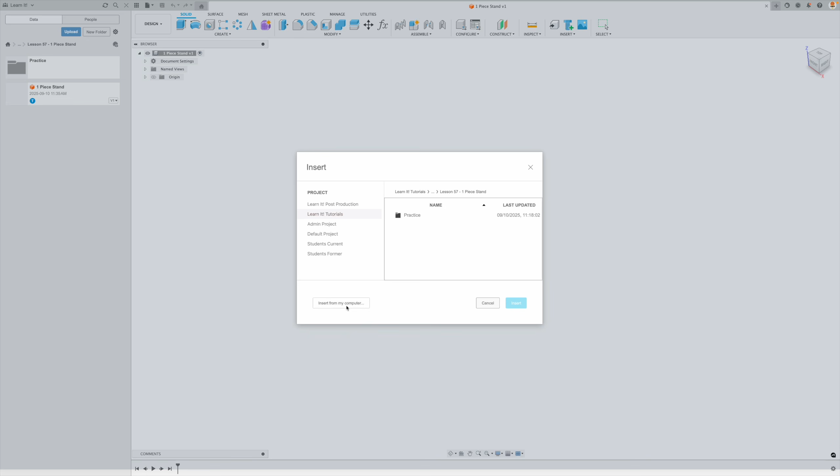Now, a lot of people will just go to insert and they will insert the canvas images. That is one way of doing it, that's completely fine, you can insert it from your computer. However, I like to put the images within my folder over here, within my project folder. So the way to do that is go to File and go Upload, and then you can just drag and drop the files that you'd like to use as your canvas images.

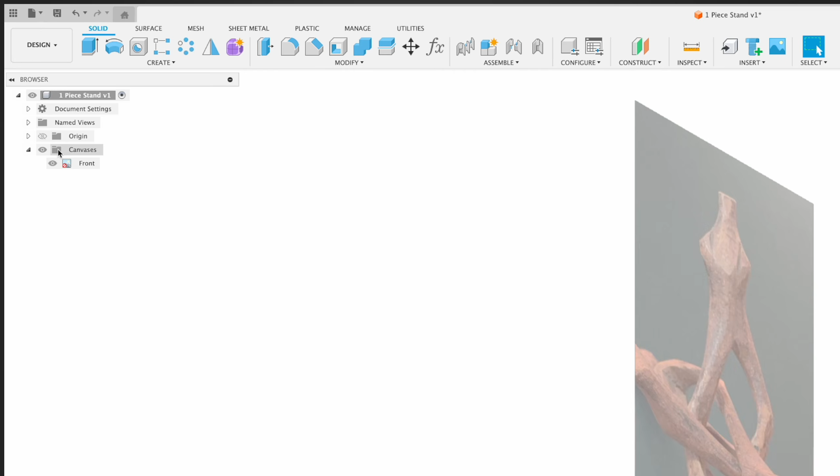Now let's go OK. The next thing we're going to do is calibrate it. Go over to your browser under canvases, and I'm going to right click on the canvas image and calibrate it. Why do we calibrate it? Because right now we don't know how big this image is. I can just go ahead and model it up and scale it later, but that has some disadvantages. So it's better to get your canvas image correct right off the bat.

And so here we go. Again, right click, calibrate. I'm going to select the nose and then select the tail. Here you can see the canvas image from those 2 points is 1.6 inches. I'm just going to call it 6 inches. Now this looks exactly the same, but it is indeed different. Whereas we model this part, the model will be exactly 6 inches from nose to tail. So there we have it.

So at this point, let's go into our form modeling environment. This is what so many out there would like to learn, but it is daunting. It is difficult. So let's get into it. Click on Create Form, and it's going to take you into the form environment.

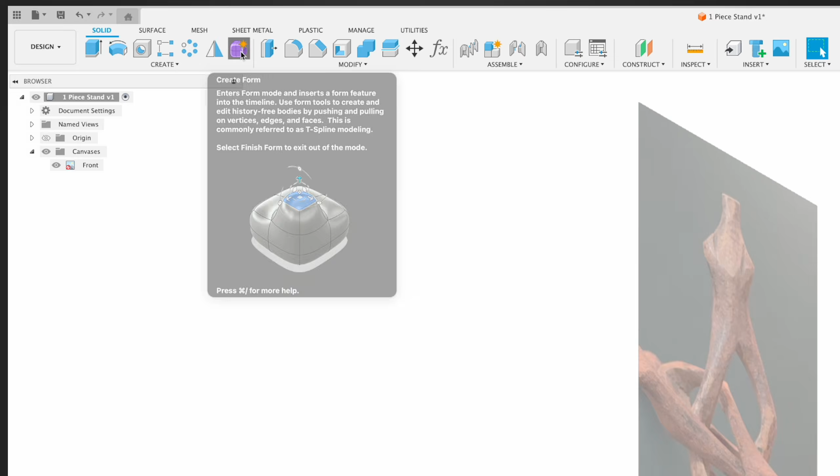I'm going to go back to the front view, and what we're going to do is create a face. Remember, in Fusion, left to right, top down. So we've got our Create drop-down menu here with all these different tools to work with. We create first, we modify later. We can add symmetry, and utilities help refine these different tools or make our design process easier.

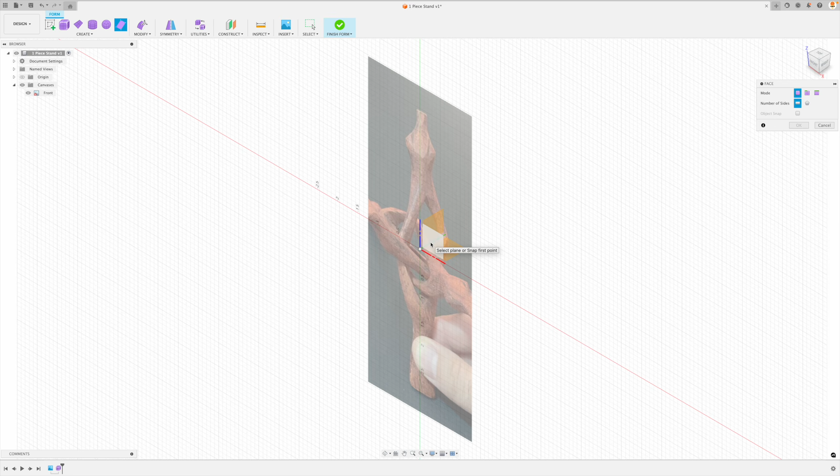So let's go Create, and I'm going to create a face. The first thing we need to do is pick our construction plane to work on. So we put our image on this construction plane. I'd like to create these faces on the same construction plane, so pick the XZ, and there we have it. We just hover our mouse and it says specify first corner.

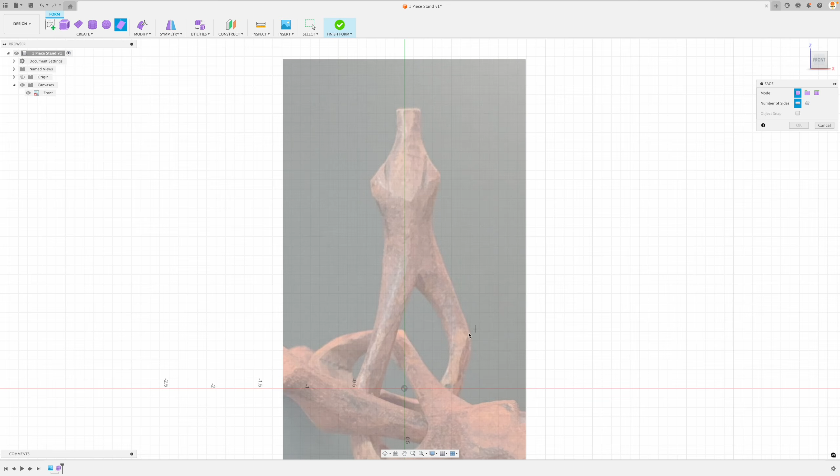Before we do so, I'd like to emphasize that my thought process here is that I know where all the peaks and the valleys are of this part. I have it in my possession, I can look at it. If you don't, you can just estimate where they are. For example, looking at the nose, I can see this little crest, that's one peak. As we go down, this is kind of a low point where it transitions to the other side. We've got another peak that doesn't go right down the center of the part, it actually goes this way. Then this is kind of a face that goes down there, and we've got a peak over there. But anyway, we need to see this kind of in 3D with our mind's eye and work with it. Don't think too much about this, just start modeling with me and let's have some fun together.

So I'm also going to picture a line going through the center just as a reference. Here we go, we're on simple mode. Actually, before we start going, you can see that my mouse cursor is snapping to the grid. If you don't want it snapping to the grid, hold down Command on a Mac or Control on a Windows computer and it will no longer snap. If you let it go, there we go, it starts snapping to the grid again.

Anyway, I'm going to create 1, 2, 3, 4 T-splines. We need to have a minimum of 4 points, it's the best method to use. We won't get into the reasons, but let's just work on down here. I'm just going to break this up. There we go, let's do something like this.

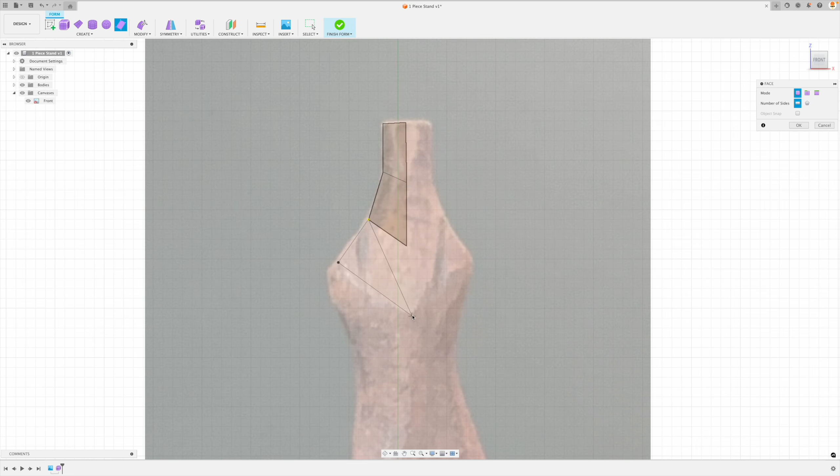And I'm going to do the same on the other side. Let's just keep working around our part over here. Again, we're working with 4 points. I've already got this and these 3 that I can select. Beautiful. So this is kind of the first object that we're working with.

If I go OK, you can see everything rounds up over here. Everything is looking great. So if I go back to face, and back to that plane, if I start selecting this again, it's going to break those into the faceted T-splines, which is fine. Let's do that. I'm going to grab this over here, and let's make these maybe a little bit bigger.

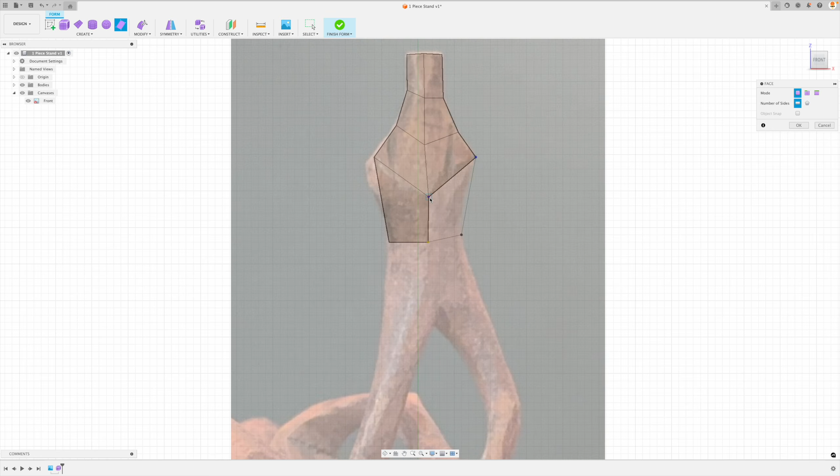Yeah, there we go. I'm going to try and place these points at intersection points. Let's not worry about this peak right over here. I'm just going to maybe do something like this. Yeah, this is all part of the fun. There we go.

And if I need to at any point, let's go back to modify, I can grab this over here and move it on over there. We're going to get into that in a little bit because I actually would like this creased, but we can do whatever we want. So don't worry too much about placing this perfectly at this point.

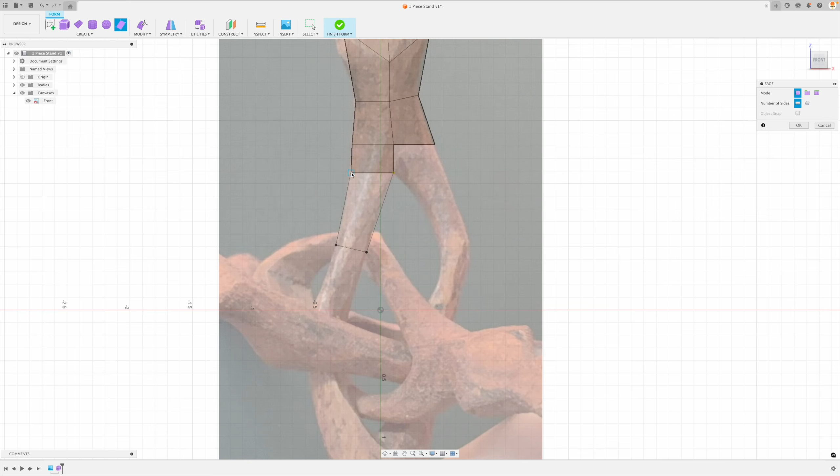Let's go back to face and keep on going. Again, I'm not going to worry about this peak right there so much. I'm just going to keep on tracing around. Now that we're here, I can go a little bit longer with these facets, with these T-splines. There we go. And of course, I can't see through this part, but I can estimate where I think it is. There we go. And again, don't worry too much. Let's do something like that.

Okay. And I'm going to go back to the other side over here and do the same thing. Just work my way down.

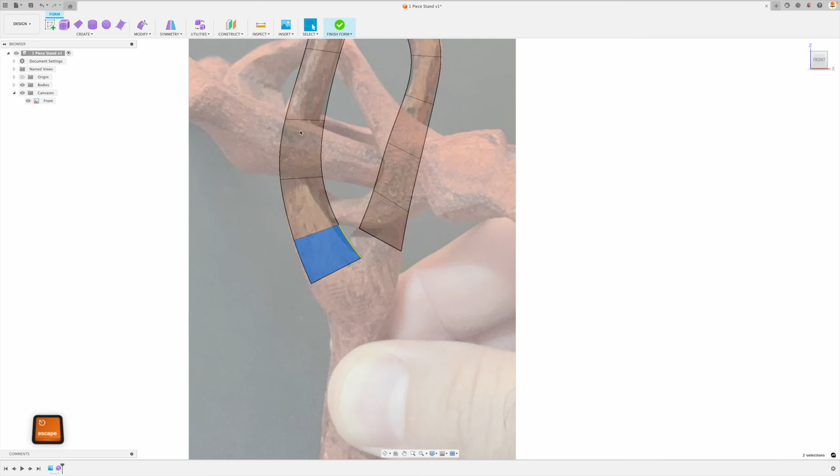Here we've got a little problem. You see I've gone too far this way. That's okay. We've got to go to modify. I can grab this vertex right there and move it on over. Okay, I can do the same thing over here.

Perfect. Let's go back to face. I'm just going to keep on moving on down over here. There we go, something like that. I don't personally know if this is the best way of doing it, but the whole point of this exercise is to just get doing something. There we go. All right. Perfect.

And we're going to finish this up. We can make these a little bit bigger. There we go. I don't really like how this is positioned, but that's fine. We can change that in due time. Alrighty. Okay, there we go.

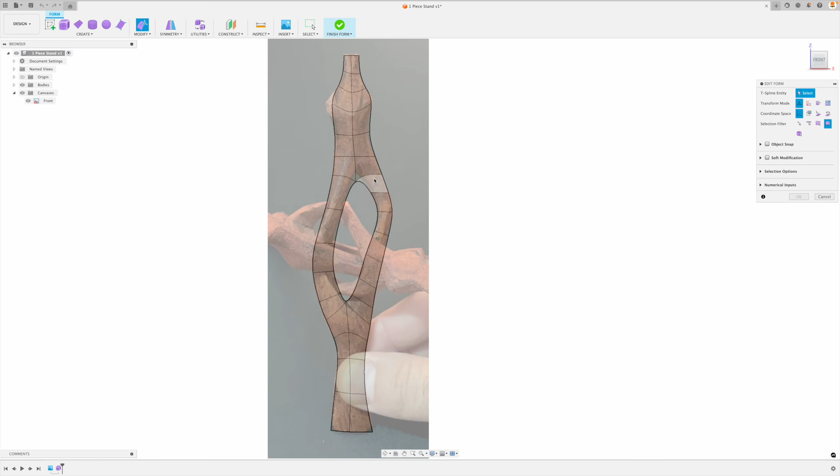So we've got the basic shape of this, and I'm going to go into modify right now, and you can see this looks pretty good. As soon as I finish that using the face tool, you can see everything has a nice curve to it over here. It's looking really good, but I would like to fix some of this, right?

So I'm going to go to modify, and I can move this right here. And in fact, what I can do is let's go to these guys, to the vertex. I'm going to move this on over. Just move these so that it's approximately the same. We can refine this later as we need.

There we go. It's looking pretty good. All right, something like that. I can always put fillets on these later, but this is looking pretty good. This is looking great. So let's go OK.

Now, this is where the fun begins. I'm going to hide the canvas image, and here we have it. This is just a flat feature right now, a flat set of T-splines. So what I'd like to do is add some volume to it.

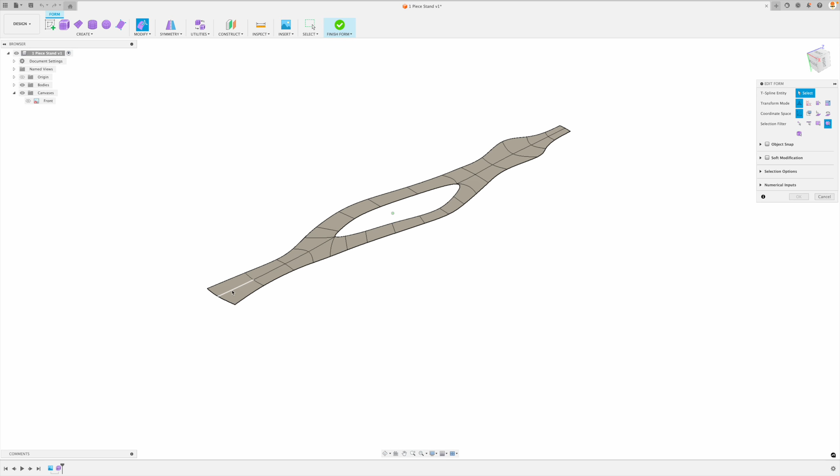So let's go back to modify. And here, if we want to pick a chain of something, whether it's a chain of faces or edges or whatever, you just double click and you can see how it picks that entire line. Now I'm going to hold down Command and double click that, and you can see that this entire chain all the way down is picked.

And now we've got this adjustment handle over here where I can grab the arrow and give it a little bit of volume right there. So that looks pretty good. I think that looks pretty good.

But before I proceed, I'm going to cancel, and let's go back to our canvas image and remember that there's this peak that kind of runs down over here, right? I would like to add that right now. So I'm going to pick these faces, something like that.

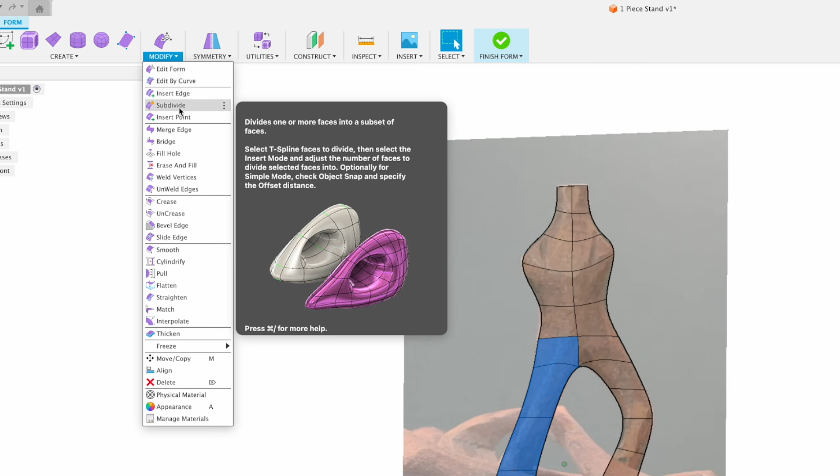Let's go to modify, and I am going to select subdivide. Now, as soon as I do that, you can see that each of these faces is subdivided into 2 length faces and 2 width faces. I'm going to see which one I want. I don't want to change the length faces, this has to be 2, but the width faces is going to go down to 1.

So now you can see that there's this line running right down there. That looks pretty good, yeah, that looks all right. So let's go OK. And do you know what?

I guess I could do the same thing on these other faces over here. Let's do that, I'm going to make it nice and even. So let's go modify, back to subdivide, same thing. Let's turn the width faces down. And now we've got this extra set of lines over there.

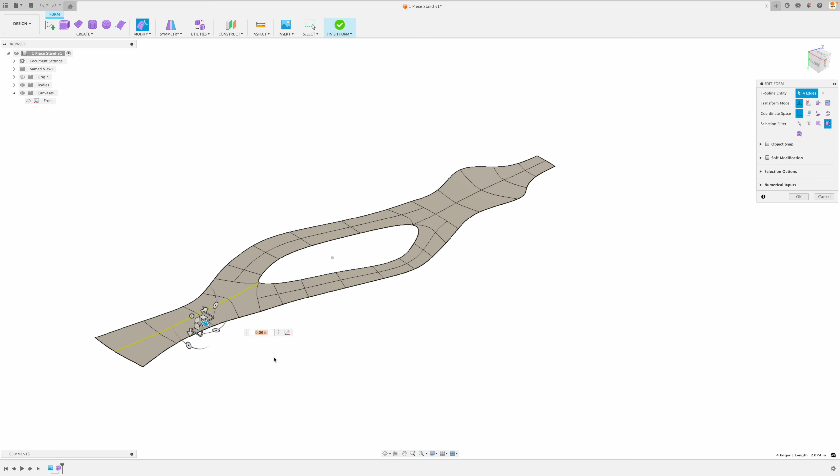That's looking pretty good. Let's go back to modify, double click, hold down command, because if I double click that, it will get rid of the first chain. So you have to hold down command or control on a Windows computer and double click all of these.

And I'd like these to be somewhat the same height. Let's do that, I'm just going to pull this on up. I don't know how far. I could measure this as well, but I know it's probably around this. I'm going to go to 1/8 of an inch, which is 0.125.

There we have it. All right, so now we've got a little bit more, you can say a little bit more volume to work with, but this is just it's not an actual body, it's just a bunch of faces. So we're going to have to close this somehow.

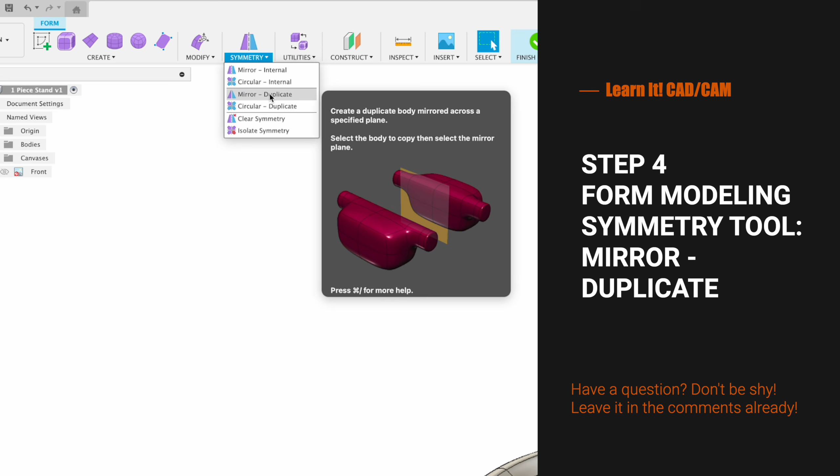So if we go to Symmetry, I'm going to go to Mirror Duplicate. So if we go to Duplicate, we can pick our set of faces and then our mirror plane. Let's pick it right there. And then we include weld, so it welds the faces together and it puts a bunch of curves on there as well, so everything has this nice continuity.

This is looking better and better by the second, so that's looking really good. Let's go OK. And now we've got this beautiful part. So as you can see, we've got this mirror line right now. So everything we do on the top is going to be mirrored, it's going to be reflected to the other side.

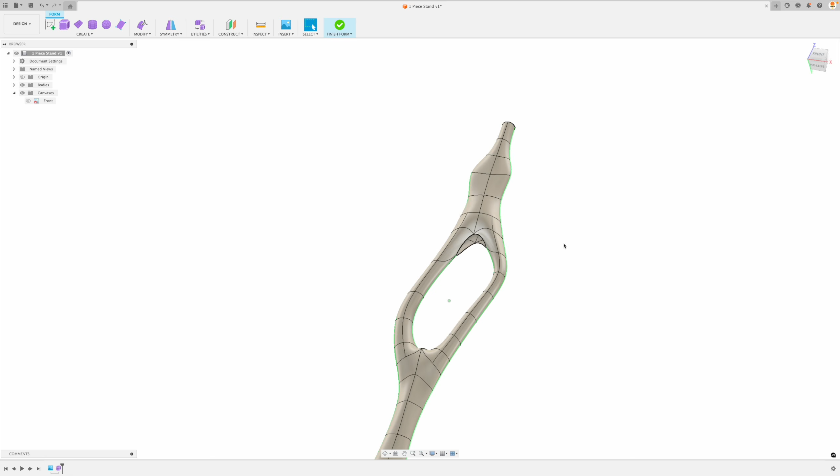So this is great. Let's not worry about the holes quite yet at this point. Maybe we can worry about these ones in the middle, but not on the tail or the nose. Perfect. So I'd like to fill these in, let's just go do that.

Let's go to modify and we're going to find the fill hole tool. So this is pretty cool. Let's go on in here and let's pick that. It automatically creates this beautiful geometry.

But if we go to front, you can see that, wow, this has really created a bridge across those two that I don't want. I want it to go further up. So how I can do that is I'd like there to be more faces. So I could subdivide it and then pull it that way, but I'm just going to experiment.

Just here's the thing, let's go fill star. Maybe I don't like that. Let's go collapse. Collapse looks all right, yeah, I think that's what I'd like to use.

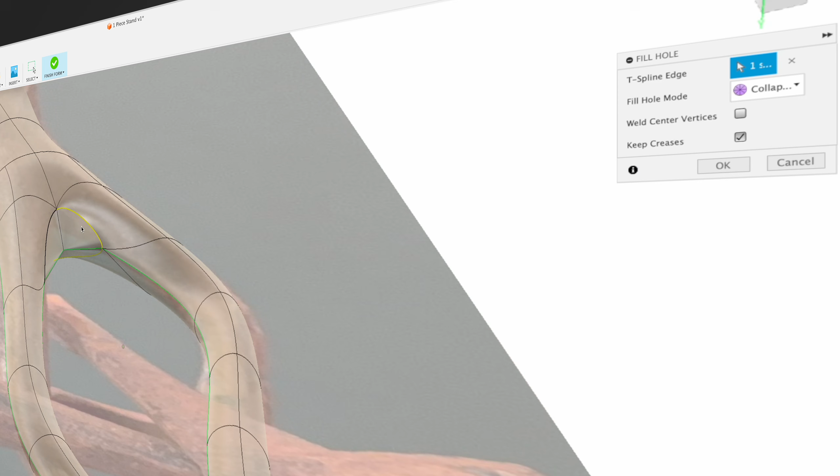Let's use collapse. Now I can keep creases as well if I want, that's these creases in between the faces. I don't really like that. Weld center vertices, that's probably better if I use that right there. Yeah, weld center vertices, so there's this nice curve right there.

That looks great. To go back to our previous tool, let's go right click, repeat fill hole, and I'm going to do the same thing over here. There we go, weld center vertices is retained.

Let's go OK. If you're wondering how I'm spinning around this object very easily, well, I've got a 3Dconnexion.

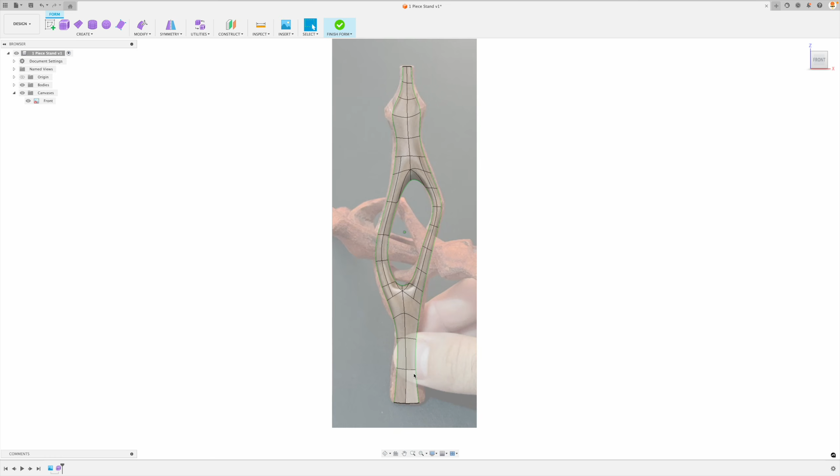Now, as I go back to the canvas image, I can see that there's a lot that I can improve with this. Because the vertices have been welded, the shape has really narrowed down, or it's not really the shape that we'd like it to be. So let's go back to modify, and this is where we're going to refine it even more.

Here's a little thing that you need to remember about form modeling: if I select a vertex, I can move that if I want. Yeah, that's no problem, I can spend the time doing that. At the tail here, it's probably a good idea to do that.

But with each of these connections, this chain of edges, I'm just going to double click. And then what I'd like to do is I've got this handle right here, and this handle, and that handle. So this handle will adjust it in—I don't want to do that. Let's just go back to 1 on our scale.

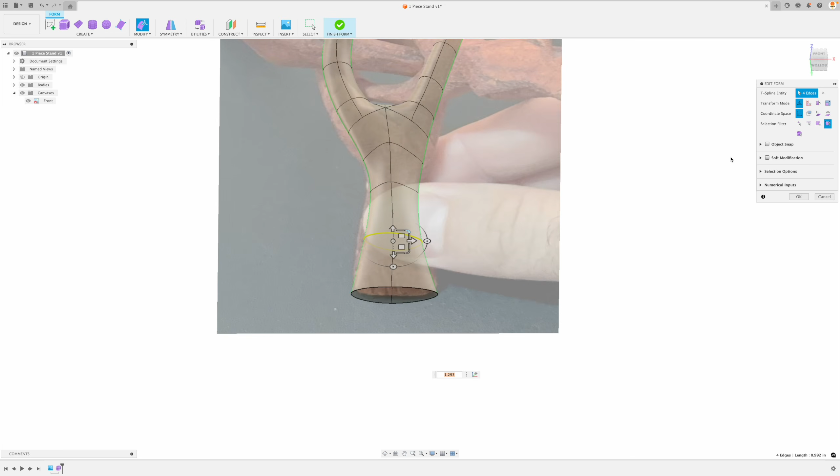This one, let's see what this does. This changes the scale, but in which direction? Let's see—does it change it in all directions? No, it just changes it in our XY on this plane.

Now, if I go over here to the center and do the same thing, it actually makes it bulbous in Z as well, so I don't want to do that. I'm going to go back to 1—that makes it standard scale—but I want to use this handle right there.

And as I use that handle, you can see that it adjusts, it conforms to the shape of that tail. Now, how do I want this angled? You see, I can grab this wheel right here and change the angle.

Basically, I'd like it to be nice and even across. And so if it's too much like this, we're going to run into problems. But I'd like to make it nice and even—I can center it. That looks pretty good.

And I'm going to do the same thing all the way down the line here. Just going to use that one scale handle, and I'm going to position it using the square one. And of course, I can change it using this angle too if need be.

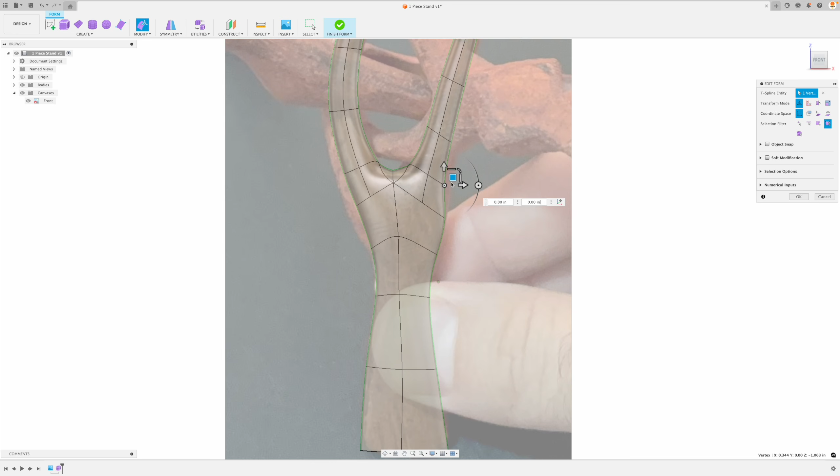Now here, I'm just going to grab the vertices and move it on over just like that. I'm going to follow it down the line so that again, I am kind of following the outline of our part over here. There we go. Let's bring that on over.

And this is where, yeah, you can spend the time. You don't need to make it perfect per se, but you can if you want, no problem. All right, let's do this over here. That looks all right—I think we can just keep this type of look. That's no problem, I don't have to worry about creasing anything. Let's just do that.

All right, let's move on down the line here. And I hope you're following along—it's a whole lot more fun if you do this on your own too, and practice along with me. Really improve your skills. There we go.

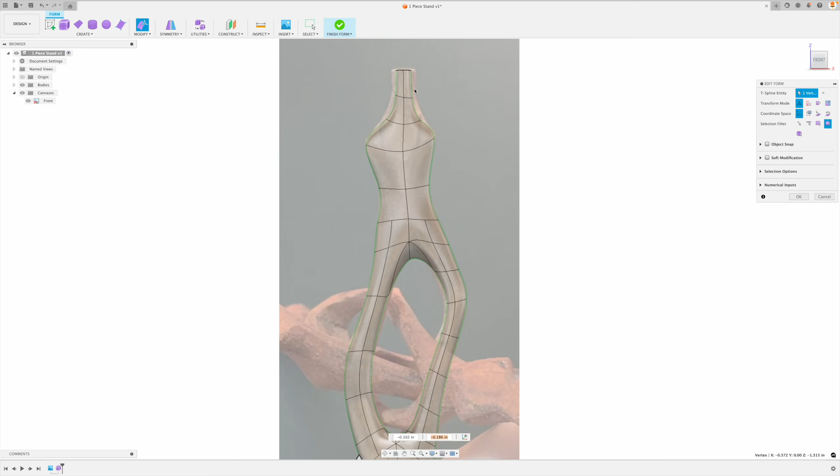That looks pretty good. Let's get the nose over here too. And for these, I'm going to just change the angle just a wee bit. There we go, move that on out. Same thing over here—something like that.

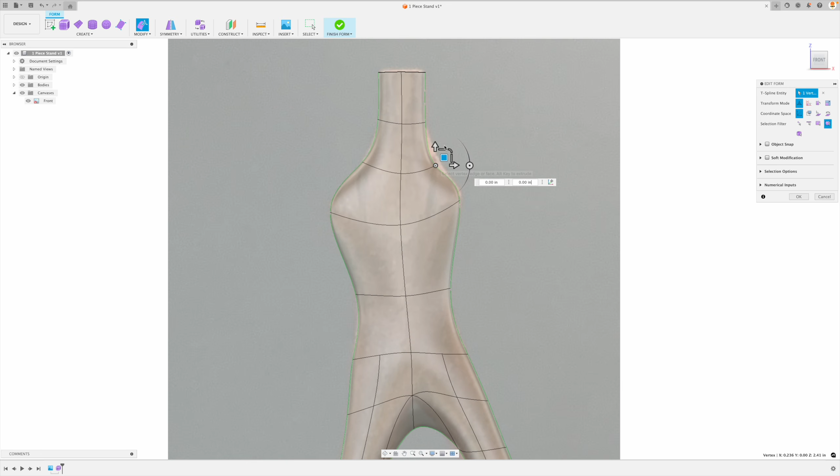Maybe these I can bring in just a little bit too. And as I change these, of course, it affects the whole curvature, which is great about form modeling and T-splines.

Now let's get the inside as well here, because I don't know how far I need to move that up. There we go, you can see it's quite a bit. I'm going to move this vertex there too—it pulls the whole thing up.

Everything you do has an influence on the other T-splines around the one that you're working on, so just keep that in mind. Don't start adjusting ones like crazy only to have further adjustments to make in the future.

But basically, here we go, yeah, just moving on around. I think this is looking really, really good.

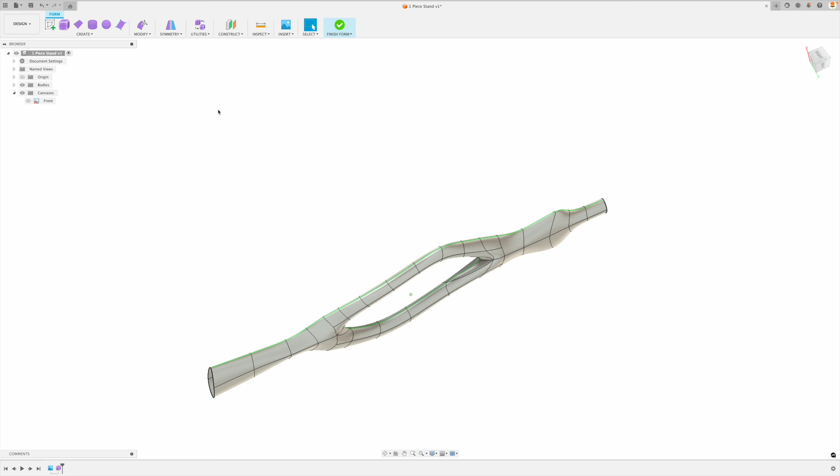So if I go OK, now let's check out our shape. I'm going to hide the canvas image. And I don't know about you, but that looks pretty cool. That's looking great.

Now remember before I spoke about the side image, and do you know what we can do? Let's add that canvas image—I should have done it before. Let's just go finish form, that's fine, let's fix it now. So finish the form, I'm just going to bring the timeline back in time, so I'm placing the canvas image right there.

We can make the original canvas, the front canvas image, visible again. And let's go insert the other canvas image. So let's go side, and here I'm going to pick our YZ construction plane.

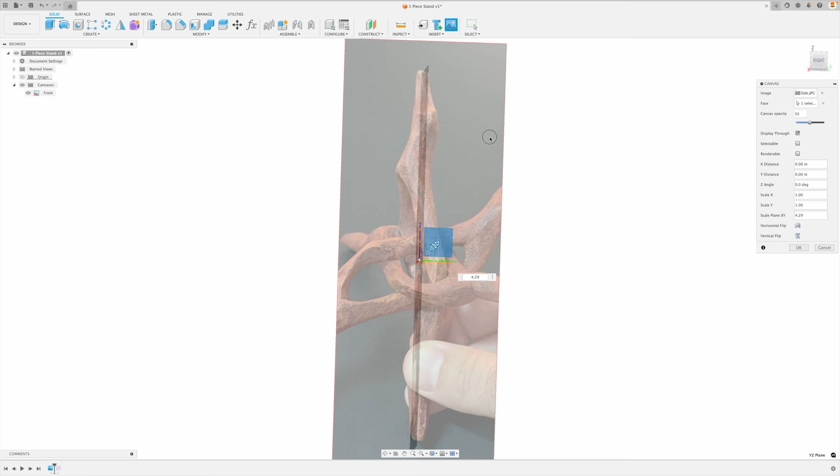I'm going to make this nice and big right there, make it the same size. There we go. I might have to bring this down a little bit. This is a little hard to see, but I want to make sure that the tail lines up with each other. There we go. I could also calibrate this, no problem. Let's go OK, and I can just calibrate it.

Let's go to the side. Calibrate from nose to tail. 6 inches, spot on. There we go.

Now I'm going to right click and edit the canvas so that these are at the same position. Again, this is kind of hard to see, but the second image, the side image, is a little bit tall. I'm just going to bring it on down, the nose in the same position, and then the tail is going to be in the same position as well. So that looks pretty good. Just going to bring this on over. Yeah, that looks all right.

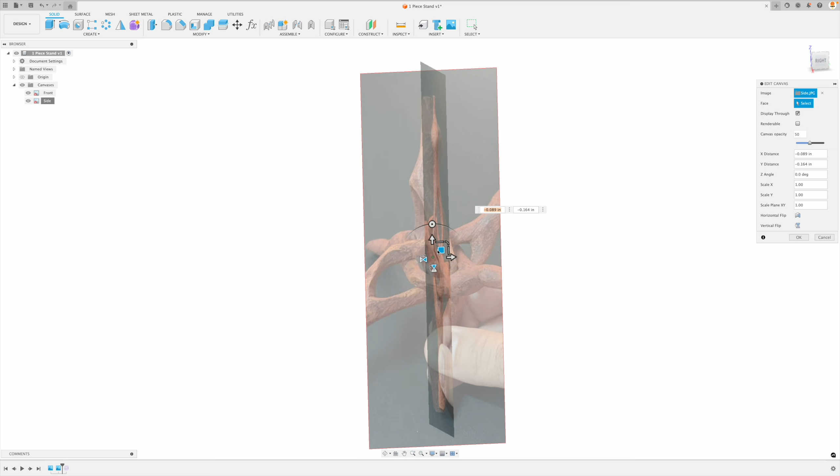All right, so this is imperative to know. In order for this stand to work, we need to kind of twist the body. So you can see that the left side over here is pulled to the left, and this side is kind of pulled to the right. Without doing this, the stand won't actually work at all.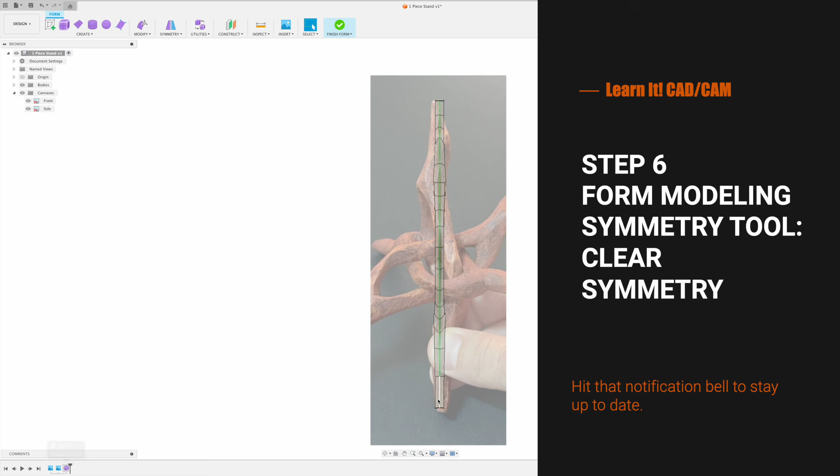So let's go OK. Now as we bring our timeline back, our form model reappears, and we can take this side view and start adjusting it. So let's go back to our form, double click or right click edit. Sometimes double clicking doesn't work. But you can see, yeah, our form now needs to move quite a bit, and we can follow the path of our canvas image right there.

So let's start at the top. I'm going to go back to modify, and here what I can do is grab, double click it, grabs that whole chain. Oh, and here we don't want to move that. Remember, this is actually symmetrical. So I'm going to go cancel, and I want to break this symmetry right now, because at first it was okay to keep symmetry, but now I need to break it.

So let's go to symmetry, clear symmetry. It asks for the surface. I can just pick that and go OK. Now that green line disappears and everything looks good. Very good. Now, has it welded the vertices, or are these sharp edges? No, they're welded. That's perfect, that's exactly what we want.

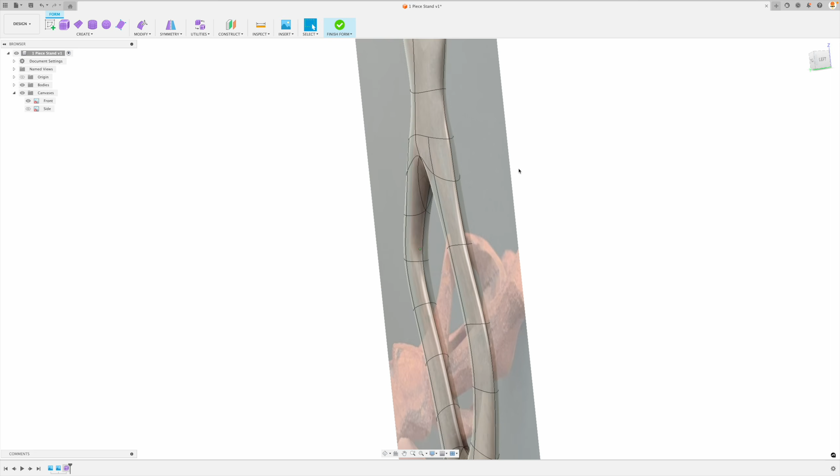So that's looking great. Go back to our right view, our side canvas image. Now as we adjust it, it won't be symmetrical along the XZ plane. It's going to be completely, well, we can control each of these T-splines as we please.

Let's go back to modify, double click that, and now we can move that off to the side. I'm just going to do the same thing. I'm going to move this on over. I'm going to adjust the size of it as I move it. So there we go, let's do that.

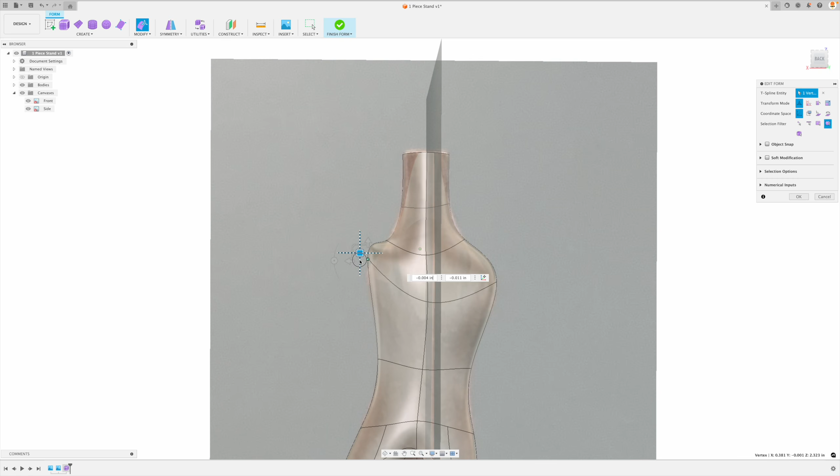OK, so as we adjust one, it adjusts the others too, so we can get in trouble very quickly. We're going to go back and forth between both of them and adjust this as we need. So here with the head of this, I don't know what it is, I think it's like a fox or a bird or something.

I have no idea, but anyways, here we go. That's kind of the head, this is the throat of it, so I'm going to move that on over. And as you can see, now I'm starting to form it along the side profile, which is really cool. Form modeling is one of my favorites. There we go, let's keep on moving on down here.

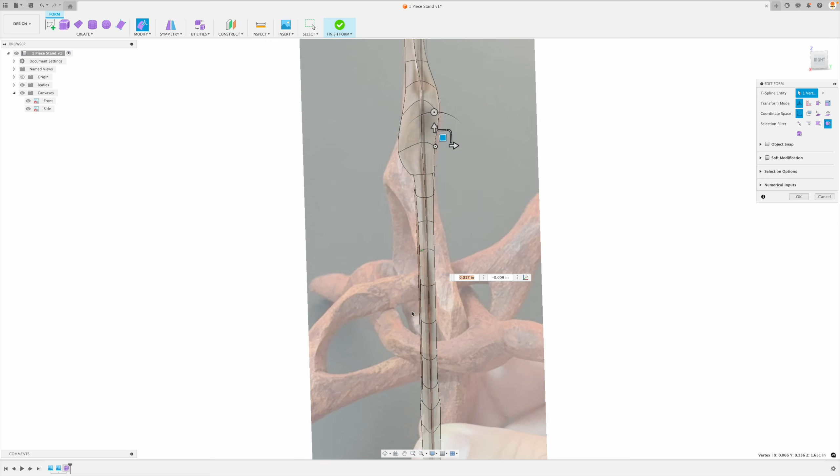Now we've kind of got a little issue over here. This part of our form is going to follow this side of our canvas image, and this piece right here is going to follow that over there. So this is where it's a little bit more difficult, but we just have to use our imagination and take it slowly. So I'm going to grab this vertex right there and pull it on over.

All right, let's do the same thing over here. Things can go pretty sour pretty quickly, but don't worry, just work on it. Just experiment, have fun. Now I'd like to grab a few edges over here. I'm going to grab 1, 2, 3 edges and I can move them all together. So let's pull that on in.

And did I go too far? Yes, I believe I did. All right.

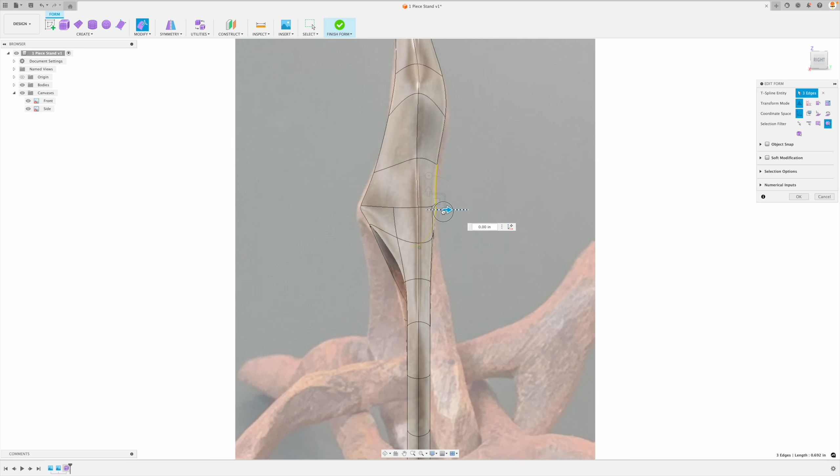Awesome. Now which will I start with? I think I'll start with this arm that's closer to me right now. So let's do that. Again, I'm going to grab this whole chain, bring it on over, and don't start adjusting everything too quickly here. We're just going to bring it in line first of all.

There we go. All right, how does that look? Yeah, well, this is going to be fun to work with. Okay, I'm going to bring that on over. And you can see that we've got some more volume to work with over here. So I'm going to pull.

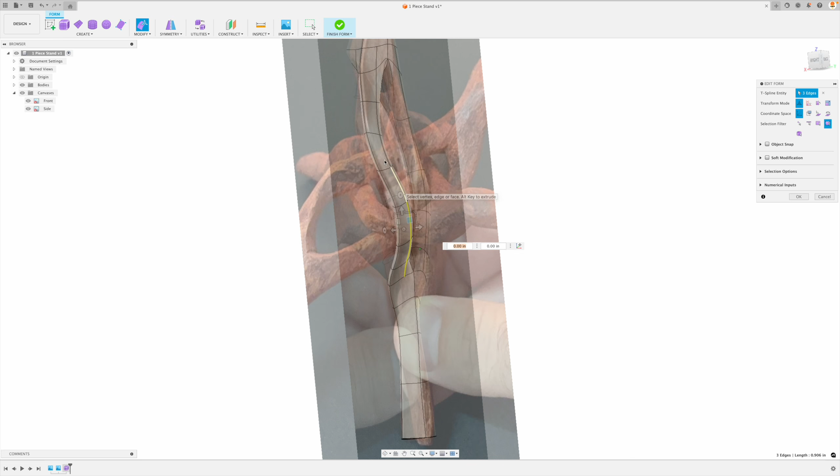Maybe what I'll do is, let's grab these edges: 1, 2, 3, 4, 5, 6. Let's grab all those edges right there and pull them on over. Perfect. And I'm going to do the same thing over here. I'm going to grab all these, and remember, I can double click and it picks that entire chain. So let's bring this on over.

There we go, I don't know, it's looking all right. Looking all right. Okay, there's a whole lot of geometry going on here, but just have fun. You'll be surprised that you'll be able to make this work.

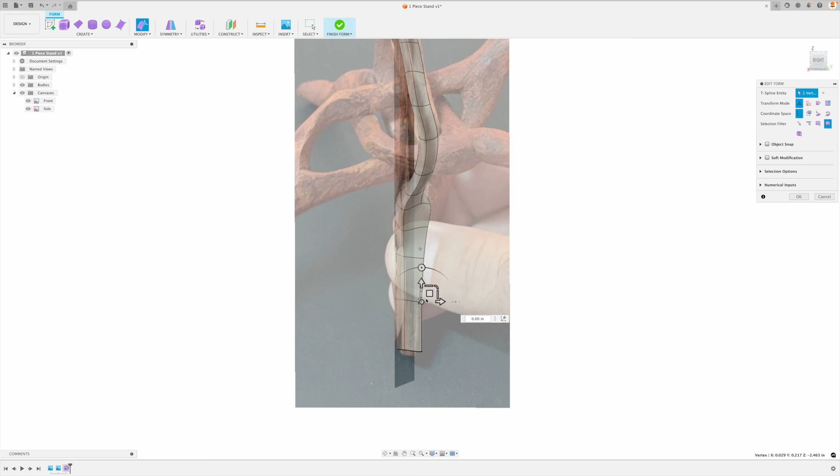Yeah, that looks all right. Let's bring this on over a little bit more. There we go, something like that. Something like that, this kind of flares in just like that. Now I'm making some assumptions over here with this shape, but that's kind of how it looks.

I'd like this to be a little smoother, so you don't want to be jagged like that. Try and make it flow as best as possible. You can also change the angle of those if need be, double click, change the angle. That looks pretty good, it's kind of following that as far as I know.

Maybe this is sticking out a little too far. Yeah, I'm just going to pull that back in. Maybe pull this back in as well, maybe do that one as well. I don't know, something like that. I think that looks pretty cool right there.

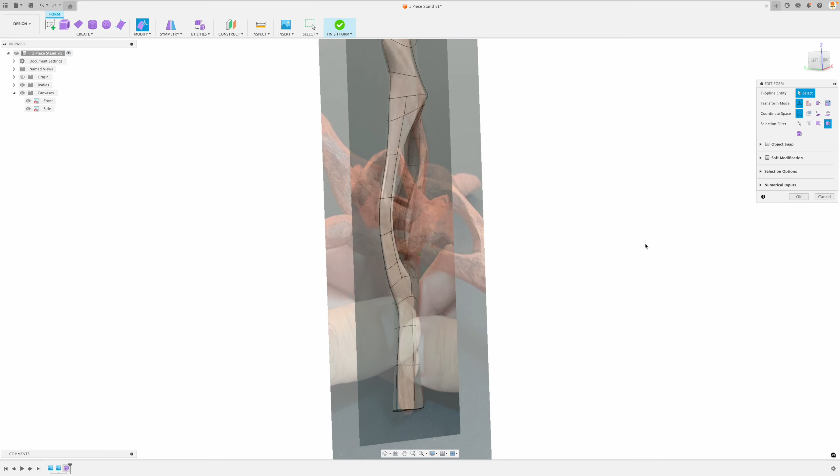Great, let's do the same thing now with the opposite side. So I can actually flip this all the way over and do it from that view, from the left view, but I'm just going to keep it on the right, and we're going to adjust all of that. Now, to move all of these, what I'd like to do is grab that chain and then grab this chain over here as well. So remember, hold down Command on a Mac or Control on a Windows computer, and now I can bring all of that over.

Now that went a little bit extreme, didn't it? Yes, it did, so that's fine. Let's just take it maybe a little slower now. There we go, make sure to double click to pick the entire chain. This will probably change the angle just a wee bit. There we go, bring that on over. So now you can see it's very smooth, just like that.

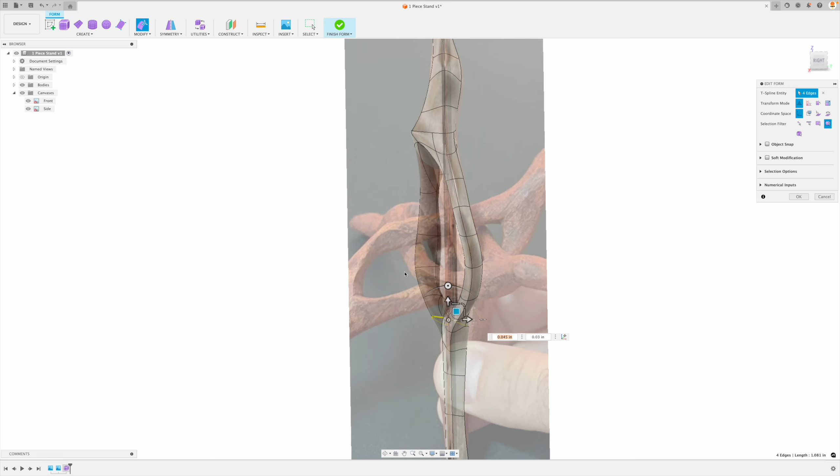And this is a little bit bulbous, isn't it? So I'm going to grab that, bring it on over. Nice, and let's hide the canvas images so we can see this a little bit more, a little bit better. Yeah, this is kind of pulled in too far, so I'm going to grab those and just pull them on out. There we go. Yeah, I think I've gone a little bit too far with that, I'm going to have to pull these vertices in. There we go.

Just have fun with it. Just do it, just get to modeling. Your proficiency in adjusting everything will come in due time.

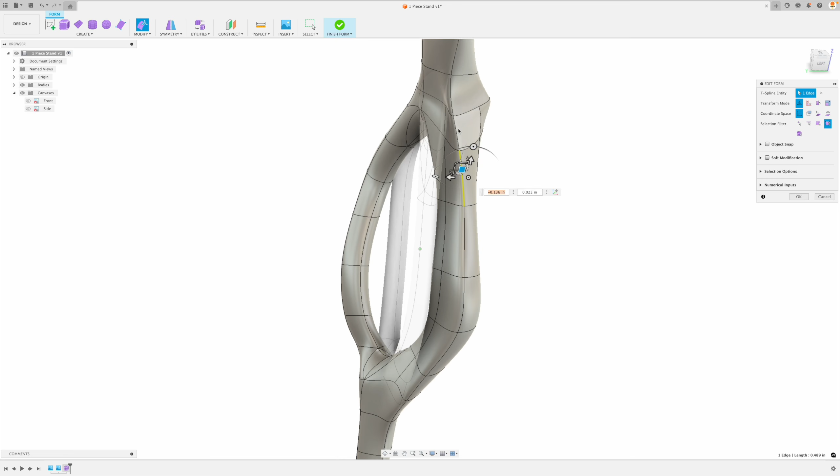So there we go. I'm just going to model this, basically looking at the object in hand and adjusting it correspondingly. So this is a little bit too radical right there. I'm going to pull that on over. Maybe that as well.

And I'd like this to be kind of the same size as this over here. It's a little bit too beefy right now. So again, if I want to change it, just double click and bring down that scale handle right there.

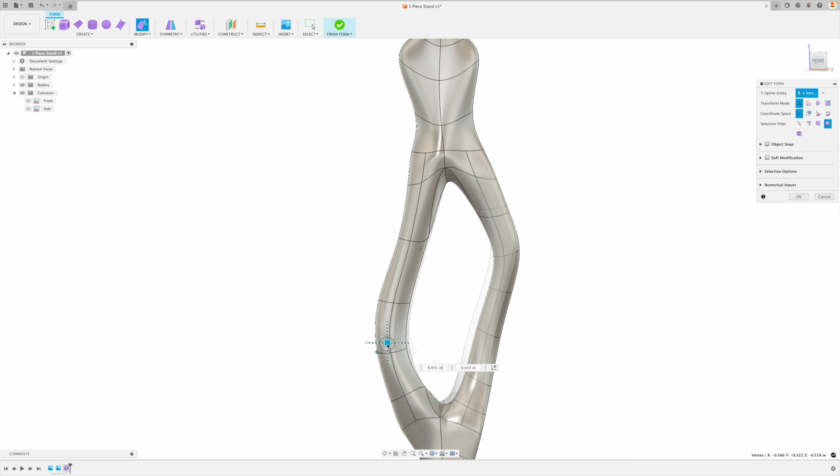So this is looking really good, I would say. I think so. Maybe you don't think so, but that's fine. All right, let's get it working here. Okay, so now you can see the shape is pretty complex, isn't it?

And this is what makes this whole thing work, is that when we rotate this around or when we pattern it around an axis, this will work out well.

Okay, let's go. We're still in our form modeling mode, and you can see that we've got the original model in the background. This is just to show us how we've adjusted it so far, if we like that. And I think that looks pretty good.

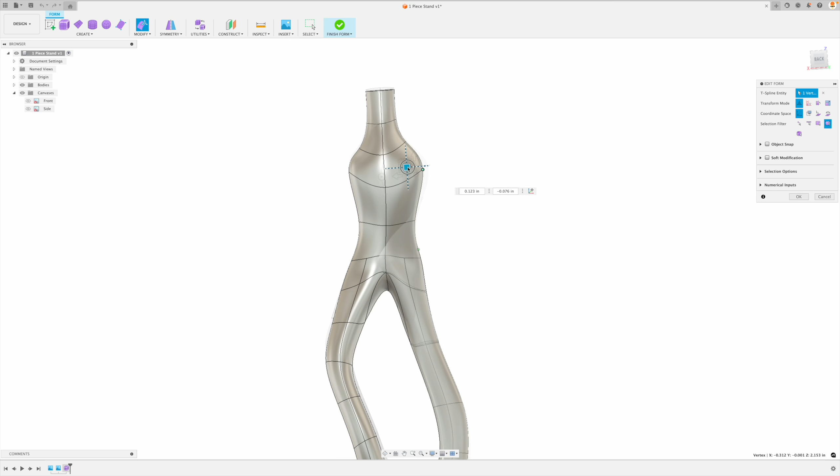I think the head over here looks a little bit wonky, so I'm just going to adjust it as I see right here. I don't have to use the canvas image all the time. I can just adjust it so that everything's a little bit more even.

Do not use symmetry at this point. Although you want these to be symmetric, it's going to make everything symmetric, which we don't want. But you can just visualize it and adjust it as you need. Very good, so let's go OK.

And now let's go back to modify, fill hole, fill this. Now, do we want this to collapse? How do we want this to work? Do we want it to weld? Do we want it to keep the creases?

I want it to keep the creases, and I want it to collapse, which means it will have the center point over there. So that looks pretty good.

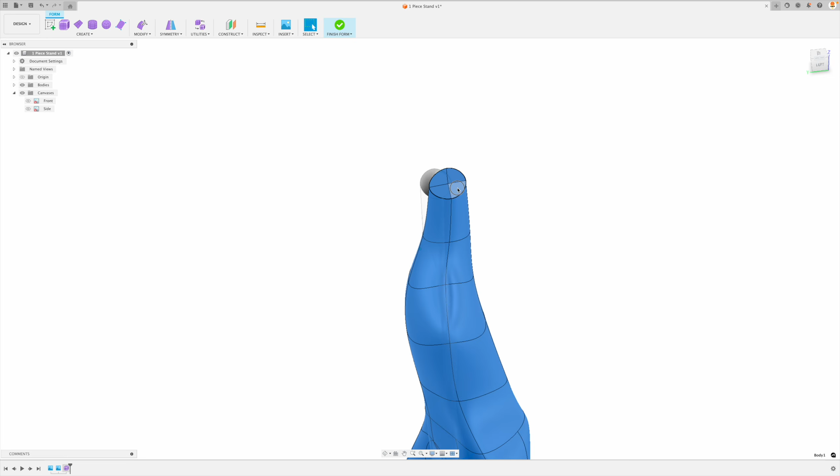Now let's see, should I adjust this? Yeah, I can adjust it. Let's pick these 4 faces, modify, bring this on over just like that. Sounds good, I'd like this to have a little bit more shape to it.

All right, perfect. Now, one thing I am going to do here is I'd like this to be the base, since this is going to stand on our 3D printing plate. So what I'd like to do is actually extend this a little bit more, and then I'm going to cut it.

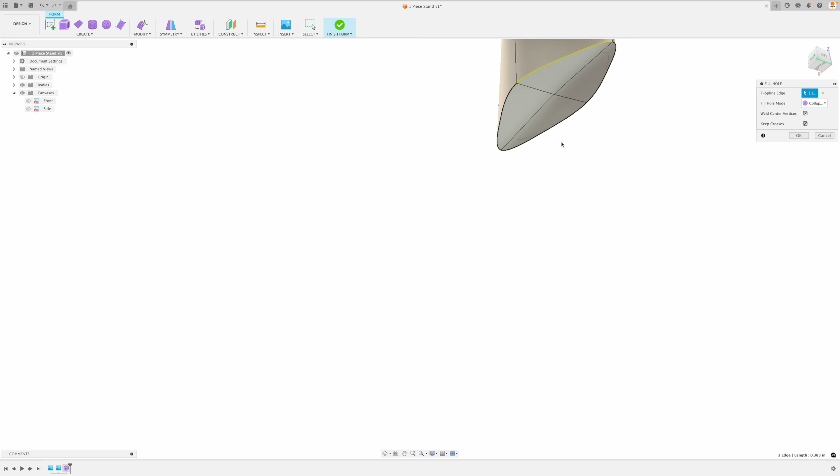I'm going to cut it because I'd like this length to be approximately 6 inches from top to bottom. But I'll start running into problems if I fill this hole in. I'll show you what I mean here. If we go to fill hole and then pick that, you start getting into some problems with there being these valleys in there as well.

So I'm just going to go cancel. Let's go back to modify. I'm going to grab that entire chain of edges, and I'm just going to bring this on down. There we go. I'm going to fill the hole in now. All right, let's just go OK.

And now I can trim this so that it's a nice flat surface to work with, and that will be perfect for the 3D printer. So anything else, should I change anything else here? I'm just going to look at the wood product that I have, the actual stand itself, and I think this actually looks very similar. Very good.

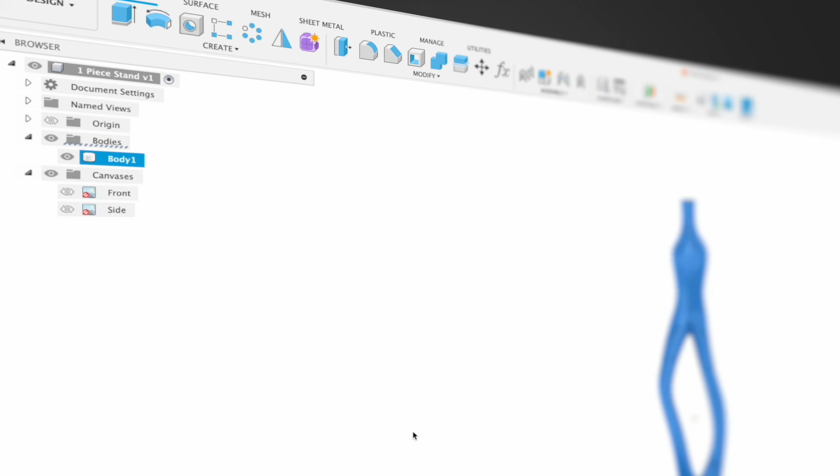Once all the holes are filled, if we go finish form, this turns into a 3D solid body. So there we go, this is looking great. Now, what I'm going to do is let's chop off the bottom.

So if we turn on the origin, I can create an offset plane based off of the XY, and I'm just going to bring this down approximately. I can even turn on the canvas image on the side there, and I'm going to cut this right in line with where it's supposed to be.

Yeah, there we go, minus 3.15, 3.125, something like that. There we go. Turn off the canvas, and we're going to split this body. So pick the body, the splitting tool is going to be that plane. And now you see we've got 2 bodies over here.

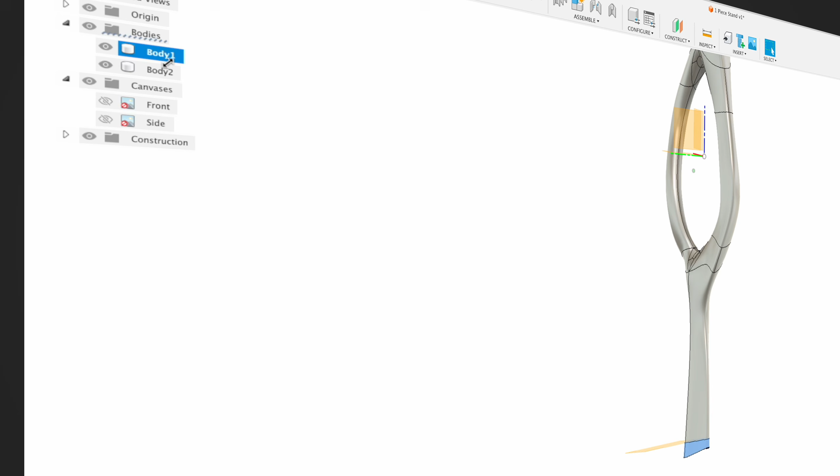I don't want body 1. I'm going to right click and go remove. That gets rid of it completely. Now you can see this is perfectly flat, which is exactly what we want. Now, I'm going to hide that construction plane.

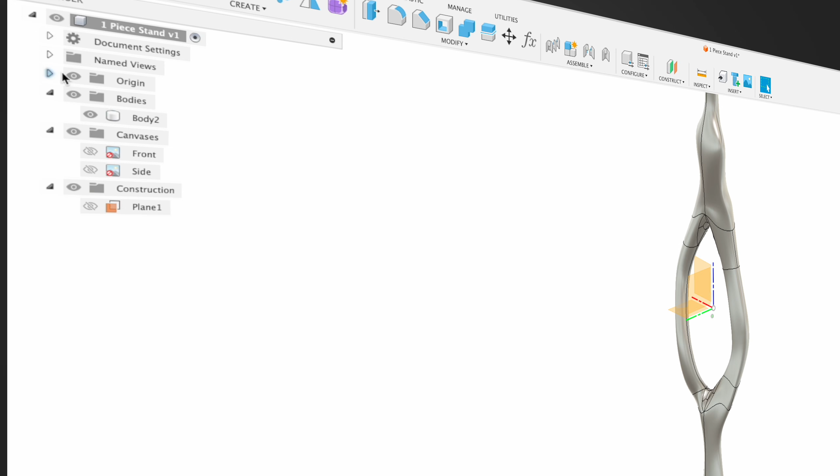Just single click, V to hide it, or I can also go to construction, and there's the plane. I can make it visible or hide it, whatever I want. The origin here is the world origin. I'm going to hide that as well.

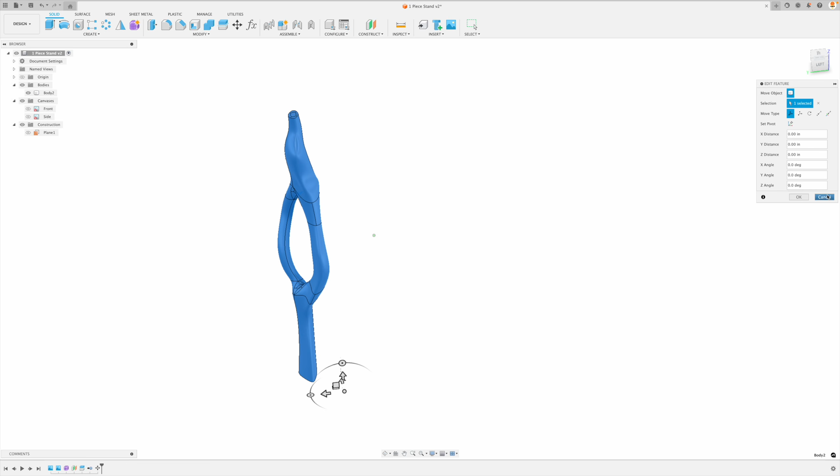So if I move this 1.4 inches and go OK, if I go back to that move feature in our timeline, you can see nothing is retained right there. Nothing has been saved, so I don't really like that. I want to slowly adjust this so that it's perfectly positioned so that all 3 of these won't interrupt each other. I'll just be able to print it, and it will work out as expected.

So what I'd like to do is turn this into a component. So right click the body and create component. I'm just going to call this component 1. That's fine, let's go join.

Now that this is completely flat, I can pick the center point, and I'm going to join this to the origin, just like that. Now this is the thing: with using joints, everything is retained.

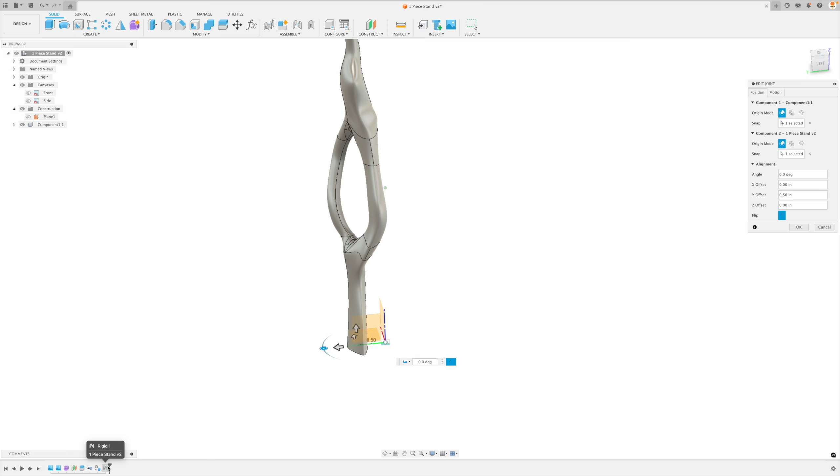So if I move this 0.5 inches and go OK, if I go back to the joints in the timeline, you can see 0.5 has been retained, which is perfect. Okay, so let's move that on over.

Let's go OK, and now let's pattern this and see what happens. So I'm going to pattern components now. Pick that, the axis is going to be right there. And now what do you think? Well, that doesn't really work for us, does it?

So this I'm going to have to angle a little bit. And if we look back at the actual model itself, this entire thing is angled. And so what I'm going to have to do is the nose is going to have to tip this way a little bit. So let's go OK. I'm going to go back before the circular pattern. And now we're going to have to angle this.

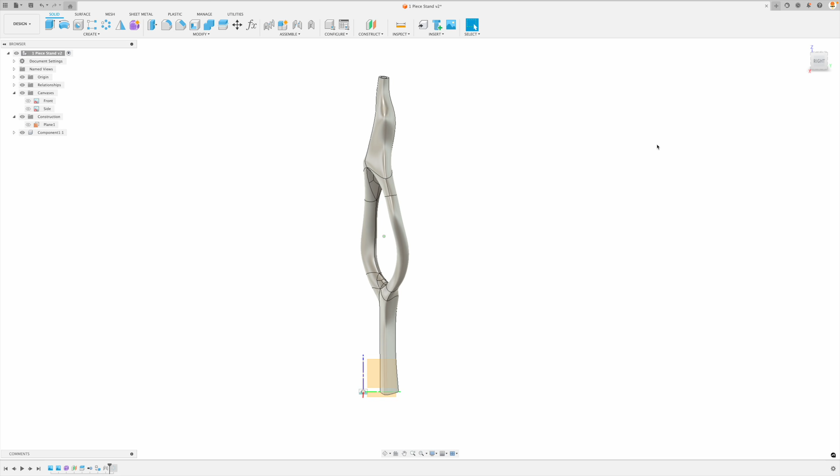So at this point we use move copy. I'm going to grab the body at the bottom, and now I can move it just like that. I don't know how far I should move it, but let's go 10 degrees. That's fine, and let's go back here.

And now this is where we're going to have some fun, as we have to make sure that we angle this so that nothing is touching anything. And of course we're going to have to go back to the form environment as well and probably change things. You can see that the bottom is no longer flat, but this is the thing, we can cut it again. No problem, so let's go back and see what we need to change.

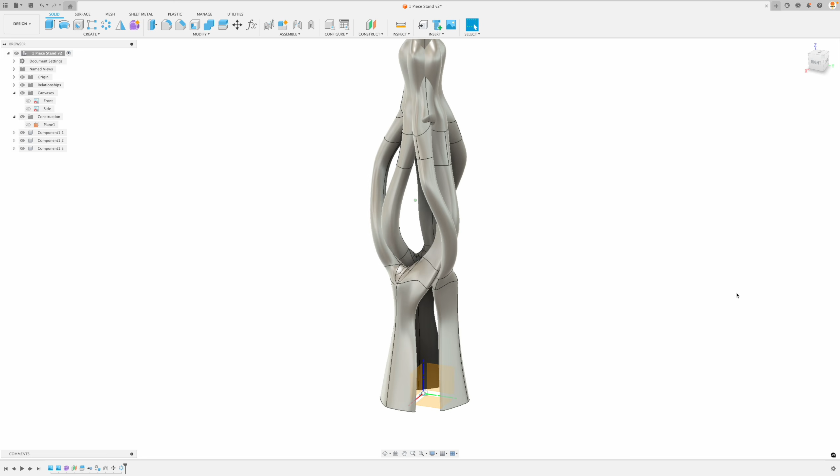Let's go back here to 5 degrees, and I'm just going to keep on adjusting this until it works. Okay, so what should we do here? What is the issue? Well, I'm not really sure. So we're just going to have some fun with it and see what happens.

Maybe we've gone too far over. Let's go to 0.3, that's not over enough. So let's go over here to 0.6. All right, so that's kind of getting there, but not really.

And do you know what? I think we've gone the wrong way. So I think I actually have to go this way. Okay, and then we have to angle it the other way.

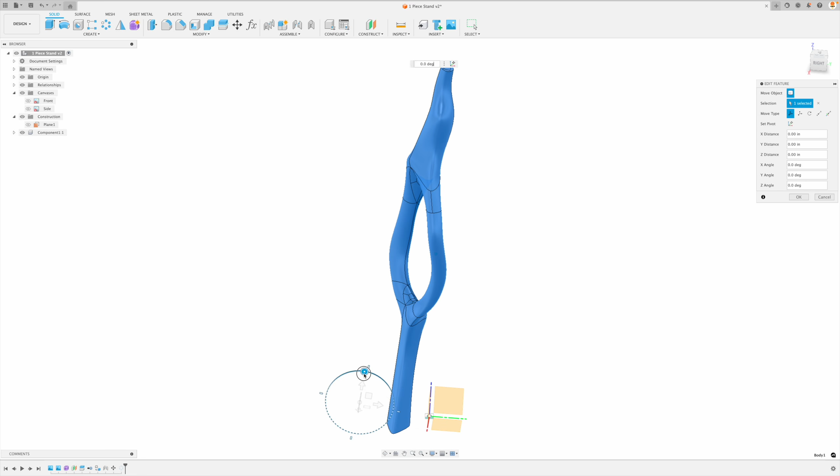All right, let's try something like that. Too much? Let's go back. All right, we're getting there, we're getting there.

Okay, so I'm going to keep on just working with what I have over here. And I'm going to verify with the actual stand in my hand that this, believe it or not, this goes to the other side. There we go.

We've got to go back over here, so I'm going to go back. Let's try 0.4, and our angle again, I'm going to angle it the other way. And let's not do anything too drastic. So let's do something like that.

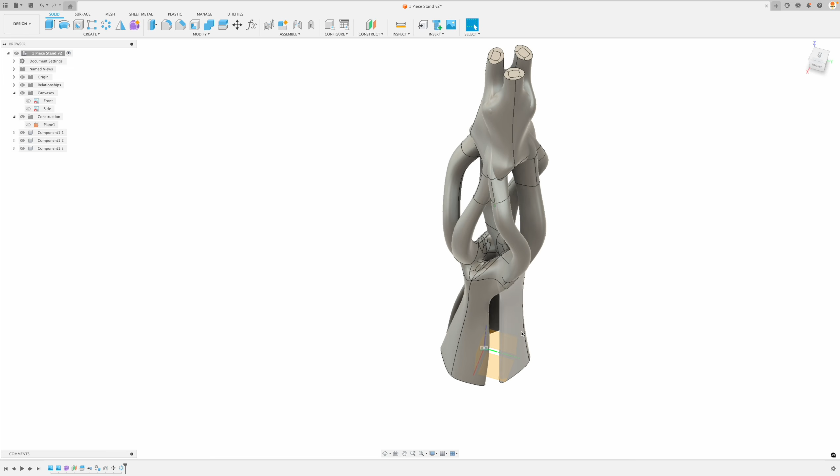Now we have to use our imagination here. What needs to be fixed? Well, let's just do something like that. That's too far.

All right, that's too far, but we're getting there. So here you can see that this is wrapping around and going in there. That's fine. If I were to move it a little bit more, let's go over here and let's have fun. Let's see if moving it to the left is going to help.

That is helping. All right, so let's move it just a little bit more. I'm going to go to 0.2. Hey, there we go, so things are working out a little bit better. A little bit better. I think the angle is too far.

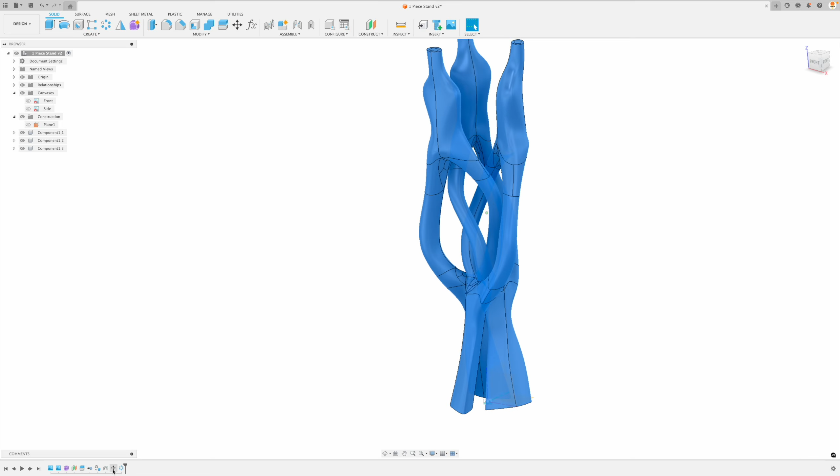So here we go, let's go back. And instead of 5 degrees, I'm just going to go -2 degrees. Oh, we're getting even closer over here. This is great. So let's go back to our joint. I'm going to move it over one little bit more.

All right, so how's this looking? That's looking pretty good. Are we hitting each other over here? I think we are. I think we are. So I think we can move this over just a little bit more.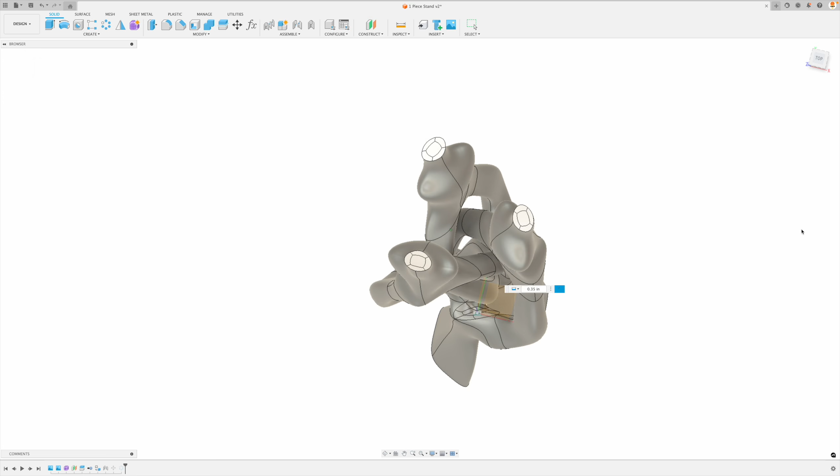Yep, let's go over 0.35. That's too far, so I'm going to move over 2.5 and then move this in. All right, so here we go.

Oh, it's looking pretty good. Pretty good. But you can see the top has a little bit of spacing, whereas the bottom does not. So let's look at the root. The root piece is right here.

Very good. And if I change the color over here, what I'm going to do is I'm going to... no, let's just keep it. Just keep it like that.

Okay, so let's go back in our timeline. We're going to move that on over. And what do you think? The angle is a little bit too much.

So let's go back and change the angle. I'm just going to drop it 1 degree, so -1. All right, we're getting there. We're so close. We're so close.

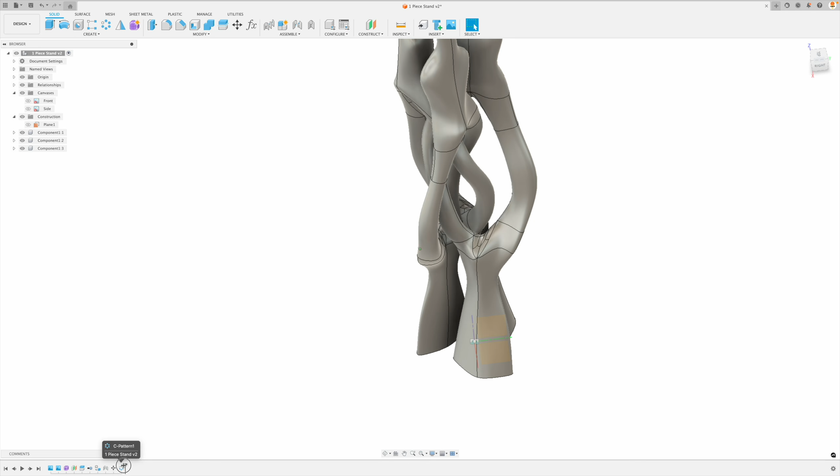So what needs to happen? Let's just look at this from the top view. This is our main piece. I'm going to go back.

And what needs to happen? So it needs to maybe rotate just a little bit. So let's go back to this guy over here, and I am going to rotate it just something like that. All right, did that help? No, that did not help at all.

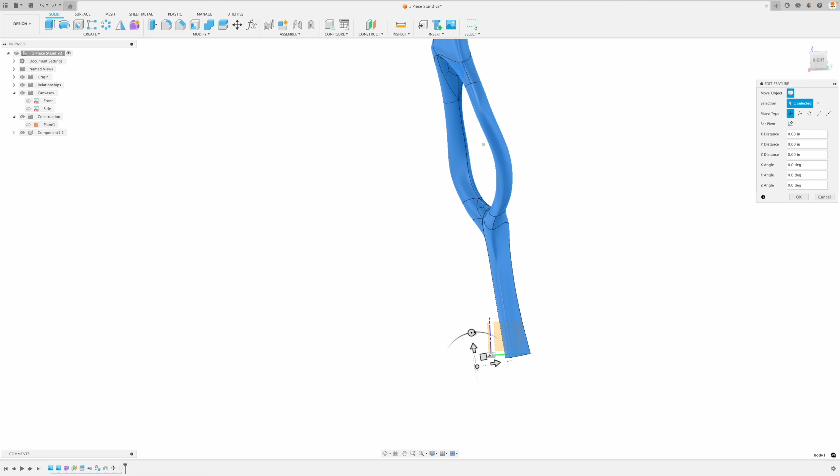All right, so I think what I need to do... again, this is our original piece right there. So this probably needs to go a slightly more of an angle once again. One degree at a time.

And basically I just don't want it hitting any other of these components. So the top looks great, the bottom does not. All right, let's go back on over here. Sorry, let's look at the main component. This one, perfect. And I think it's easy if we go to the top.

There we go, let's go back here now. And what needs to happen? So again, this is the main component. If we move it a little bit this way, that might help. So let's go back here, and I'm going to move it just a touch.

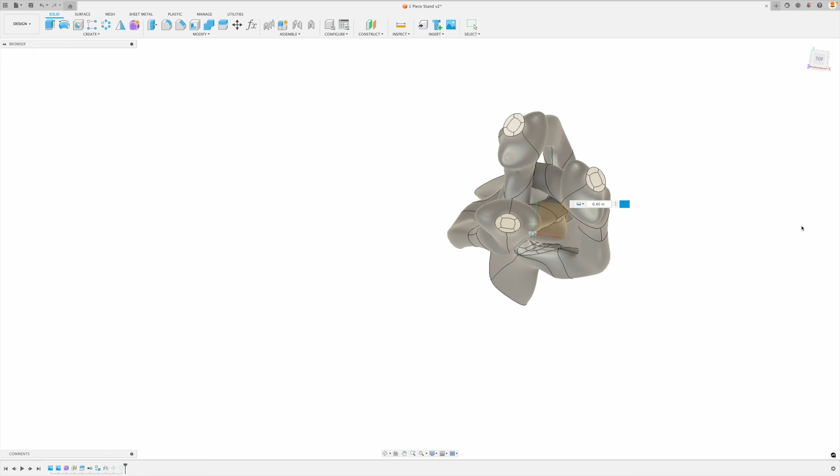Oh, we're getting so close. Is it touching anything down there? I don't think so, I don't think so. Or it's very close. Let's move it just a little bit more, something like...

0.425, I don't know. Very cool, I don't think anything is touching. Yep, I think that's it. So the whole goal here is you're just going to slowly move things so that nothing is touching each other. That's perfect, that looks really, really, really good. So I think we can just go ahead and get this printed.

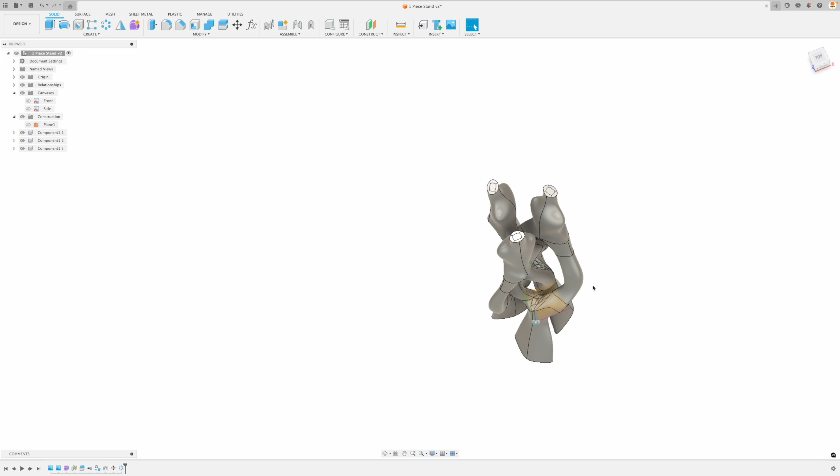Now, I do see a problem though, because let's see here, the faces are pointed away on the actual model. I could work with the angle of these a little bit more, but I think I'm happy with this. As long as they're printed without touching each other, we can utilize this as a stand, no problem. So this is looking really, really, really good.

Very cool. So now what I'm going to do is I'd like to trim the bottom so it's nice and flat again. I'm going to do that before the circular pattern. So let's just go back there. I'm going to go back now to our split body. And is this completely below the XY plane? I think so. We can just pick that as our splitting tool.

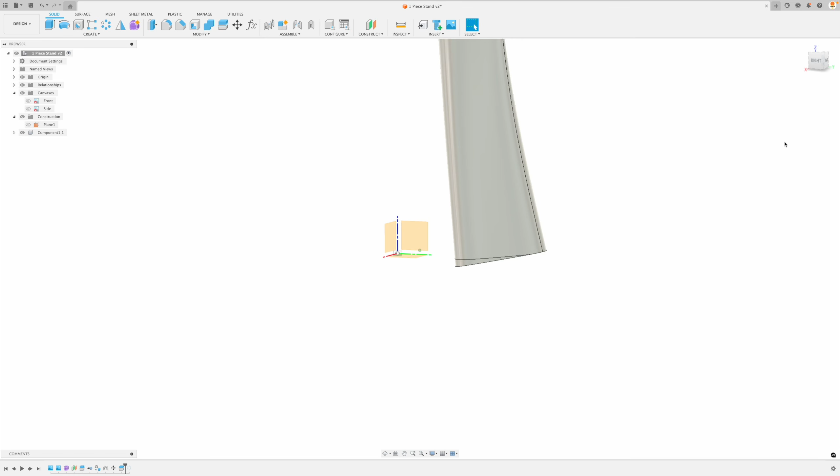Does it go all the way through? Yeah, that's fine. If it isn't, we can just delete. I'll show you a little trick here. Let's go back to our component, back to our body. Let's remove that. And then this right here, if I delete that, it's going to heal that face and make it perfectly flat. So beautiful.

I'm going to hide the origin again, and we're going to go back to our other models. This is really, really cool. So let's hide that joint, just V to hide. The joint is over here in relationships. We can always go back to it, make it visible, or edit it, whatever we want. I can also click it in the timeline, no problem. So that looks pretty cool.

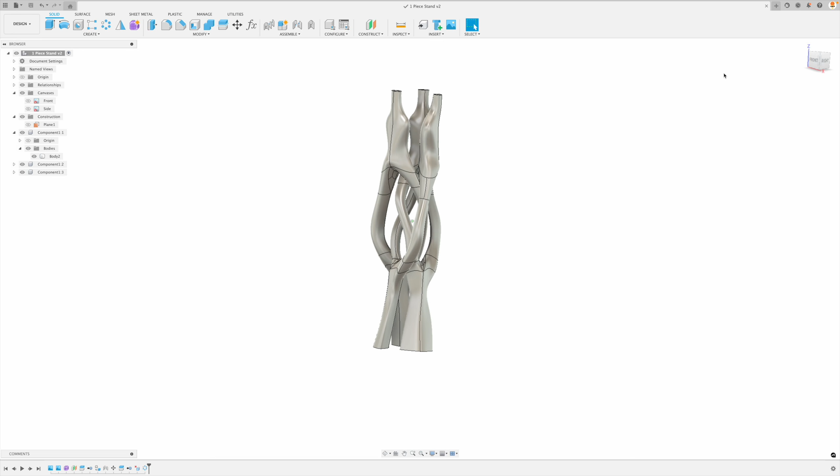All right, so let's save this and let's go over to our Bambu Studio. If I go up here to file and then go 3D print, I have an H2D printer, so I can go right into Bambu Studio and select my object. The object I want to select is the entire assembly. We don't want to pick the individual components because I want to send this over as an entire assembly, and I can send it over as an OBJ.

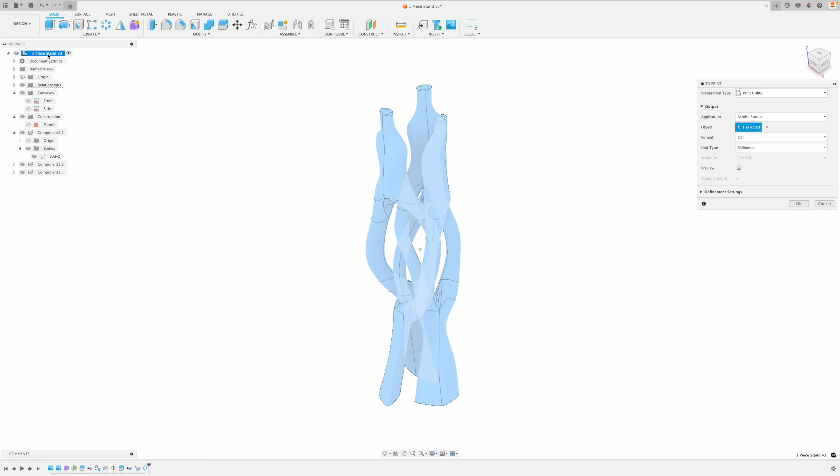The cool thing about an OBJ format is, if we go back to the model before we send it on over, I'm going to go A. I have saved my PLA as the actual colors, the names and everything, the specific colors, so it will register automatically within Bambu Lab. I'm going to just grab the cyan there. It will turn all of them the same color. Close. Let's go back over to File and 3D print it. Select the top level component right there, our entire assembly. Send it on over to our Bambu Studio now.

As soon as we do that, we can go OK. And here we have it. So we've got our part ready to go. I'm just going to sync info of the printer right now, continue to sync filaments. I'm going to overwrite, synchronize now, and it actually didn't retain the color. So all I have to do is click on the part itself, and then whatever filament I want, I just press 5 and it will change it to the right color. I can go 3 for red, 5 for blue, 4 for black, and so on and so forth.

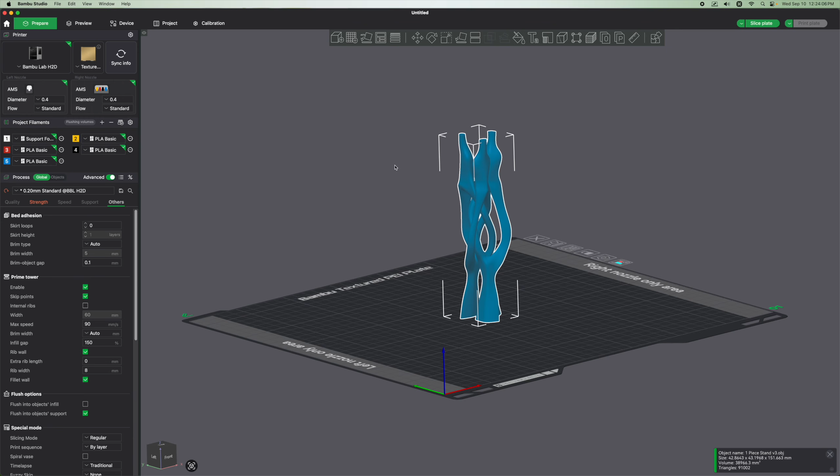But there we go. Now just for fun, I'd like to show you Bambu Lab is amazing. It's very easy to work with. I'm just going to go to strength and add an extra wall loop. And then here's a little trick. If you go to slice plate, this will have all of these different layers, which is fine. But here's a cool thing. If you go to prepare again and go to others, I'm going to go all the way down here.

Where is it? Fuzzy skin. Okay, so let's go to all walls and the fuzzy skin. I'll just show you what it looks like with the default settings. If we go to slice plate now, you can see it adds this texture to it, which is a little bit extreme. So I'm just going to bring this down to something like 0.15 and 0.15. Let's go slice plate, and now it's not so extreme for the fuzzy skin. There we go, slice plate.

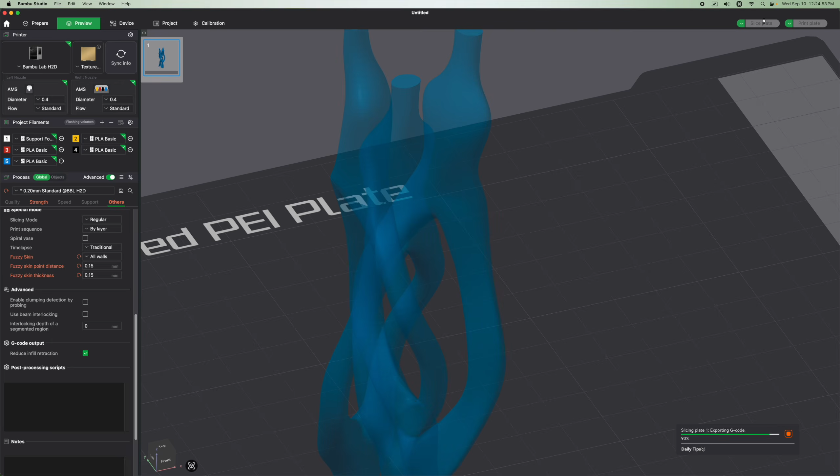Beautiful. Okay, and you might wonder what these little white dots are. That's the seam, that's where the printer starts with every subsequent layer. Okay, perfect. There we have it. So we've got this ready to print.

I'm excited, I'm very excited. If we go to device, I'll actually show you what the printer looks like. We can press play and it will take you right on over to Learnit's printer, ready to go. There it is. We go back to preview and I'm going to print plate. So there we go. It's going to take almost 4 hours, 37 grams of PLA. Let's go send and let's get this printing.